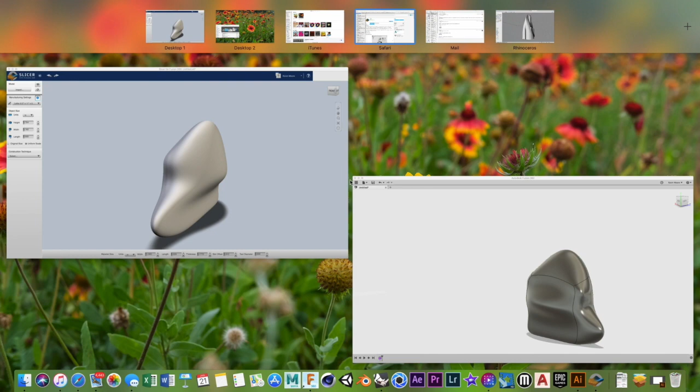Then once you download it, go through the installation steps on the program, and then launch Fusion. Open the model that you've created that you want to make into a sculpture. This is just a really quick, easy kind of shape, just as a demo.

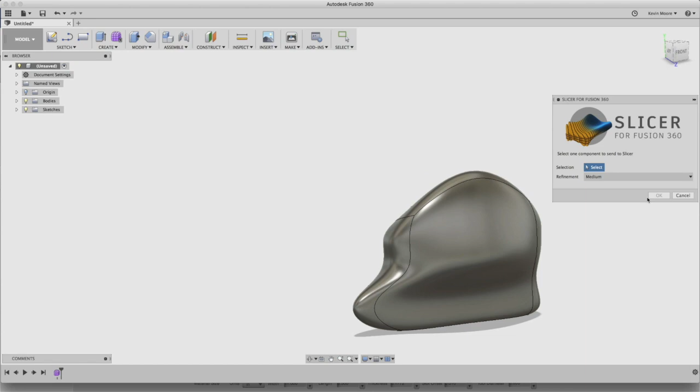And then you should be able to go right here to make, and then go to Slicer for Fusion 360. Make it high, click on it, okay. And then it'll automatically launch Fusion 360's Slicer plugin.

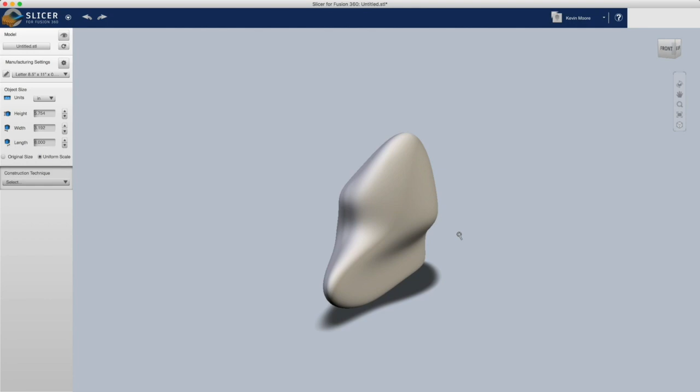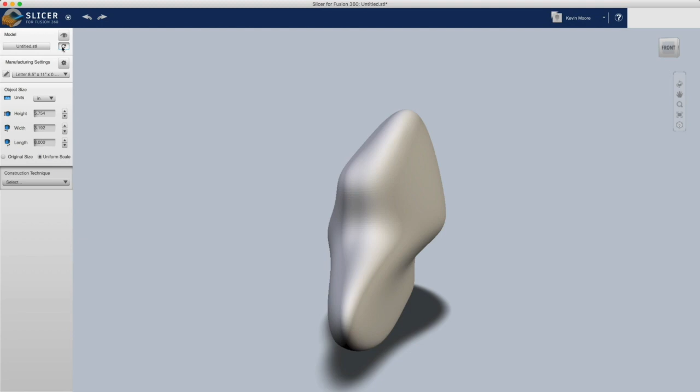Alright, so this is the model, and navigating this screen is a little different than Fusion 360. You actually right-click to move around the orbit tool, and then zoom is the mouse wheel or pinch. So now, first step, we want to make sure it's oriented the right way, which it is. If not, you can click on this little rotation button, and it'll rotate it a few times for you.

So mine kind of went up like that.

Okay, so now I'm going to change the size of my page that I'm going to use. And if you're using the laser cutter, the maximum size is 12 by 16. So you click on a little plus window down here, rename it to 12 by 16. And then you're going to do the settings over here.

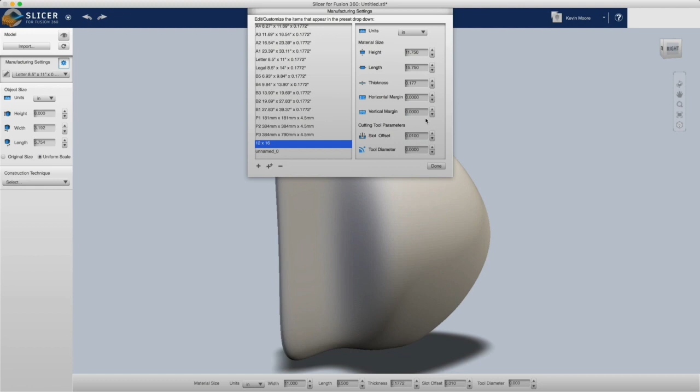I leave 1/4 inch on either side just to be safe. So I make the height 11.75, the length 15.75. Thickness, I've got a caliper, so bring your material to me early and I will measure the thickness, and you can enter it right there. And then the rest of it should pretty much look like how I've got it here. And of course, make sure you've clicked on to 12 by 16, that's highlighted, and that's where you're setting this up. Units and inches, done.

Alright, and now you've got to click on this window and change it to the right size. And then we can also increase the size of this. So our height right now is 8 inches. If I wanted to make it 10 inches, it depends on how much material it's going to use.

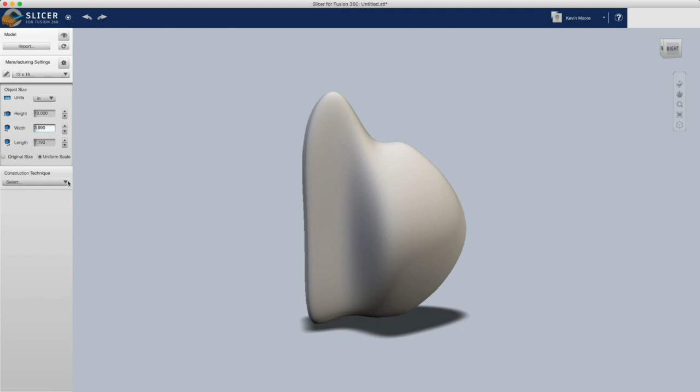So then we select our construction technique. Now all of these techniques are going to be laser cutter friendly. So for example, stacked slices, that gives you flat planes stacked, but because there's no negative space within the planes, it's going to use a lot of material. See, so on the right it gives you kind of the plan of how it's going to look, and so you've got 8 sheets.

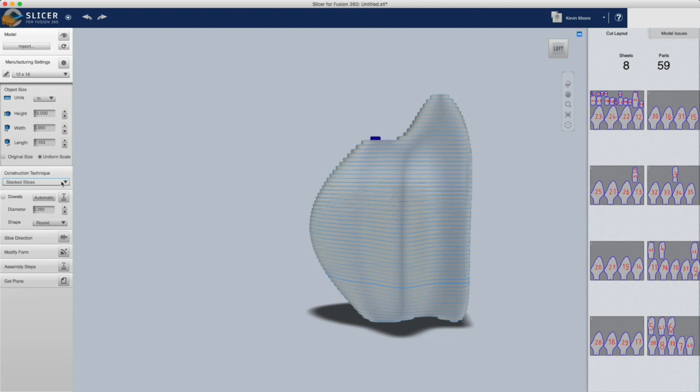So if you want to use 8 sheets, you can use this technique, but there are other techniques that use less. So let's go to a different one: interlocked slices. And so that gives you a little bit more negative space, which gives you more room to mess with.

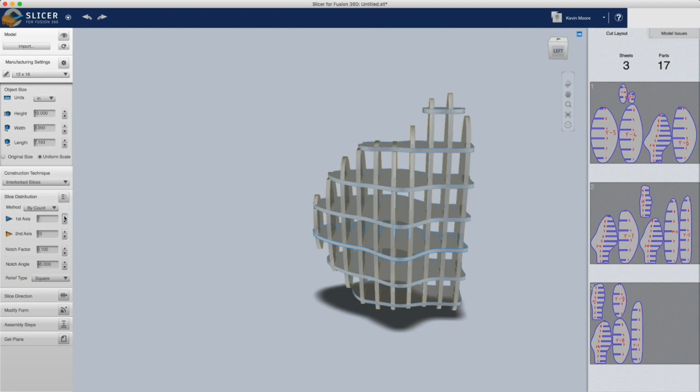So I can remove sections if I want to. I can do all kinds of changes. So I can change my axes so I can make more. Try to fill up 3 sheets as much as I can. I can reduce the number.

So it's just kind of a simple shape like that. And then it's only using 2 sheets.

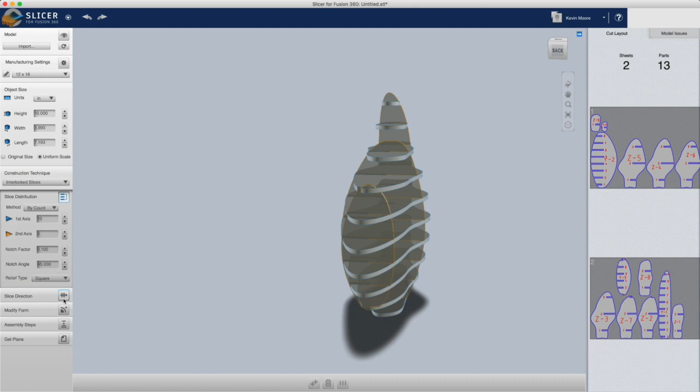And then there's other things I can do, like I can modify the form or change the slice direction. This is actually, so if I rotate it, you'll see. So there's lots of different ways you can modify it.

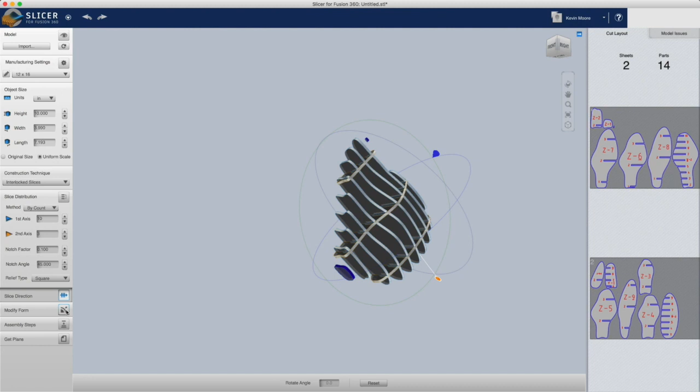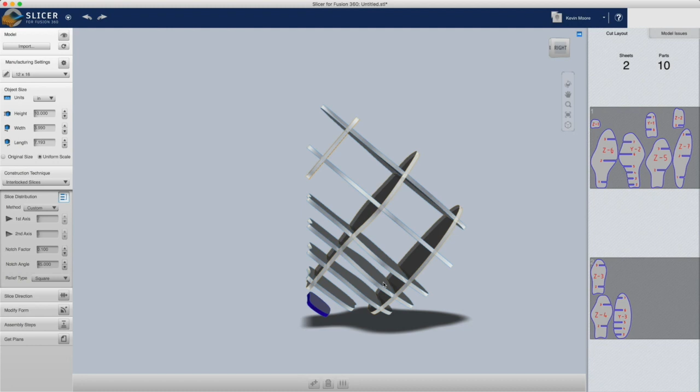You can also, if you wanted to mess with the symmetry some, you can just click on, actually let me finish the modify form, go over here. I can click on different panels and delete them to kind of create a little different look. If I want to get rid of this one that's floating too, you can undo if you want to bring it back. And then I can click on individual ones.

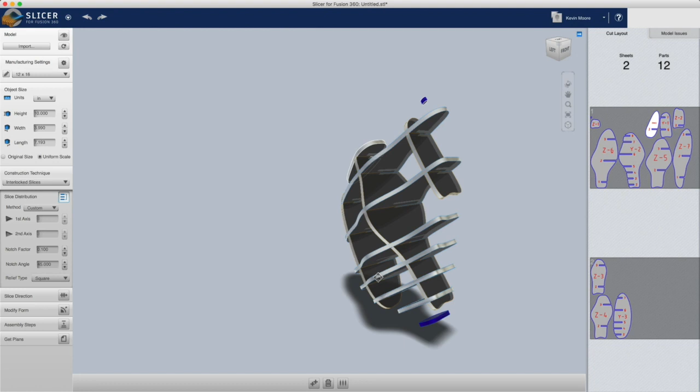The program's a little wonky sometimes and things get jammed up. But that's the interlocked slices, and you see you can delete certain things and move things around.

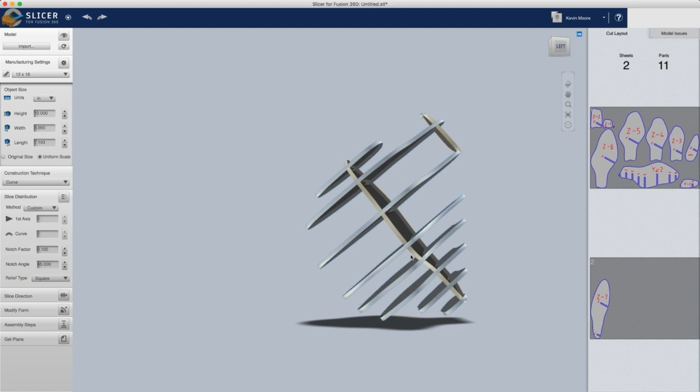And then there's also curve, which just kind of angles the shape a little bit more. And then there's another one, radial slices, which uses kind of a centered axis point. And so I can do by count.

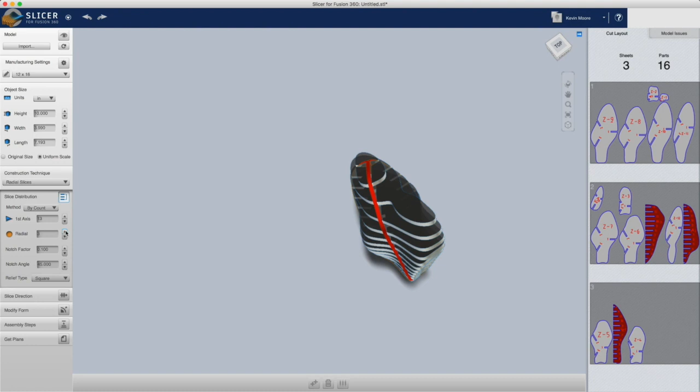Again, I can increase that count, increase my radial axis. And if you see these red marks here, that means that there's some kind of an error going on where there's parts that intersect each other or something like that. So you can play with the numbers a little bit, and sometimes you get rid of it, like I just did. So now these 3 sheets should work.

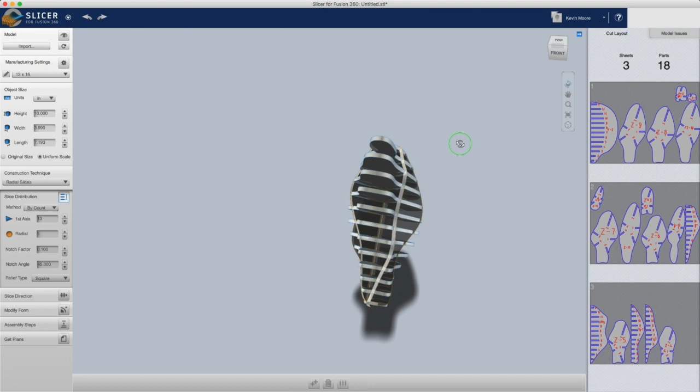Okay, so that's radial slices, and that's a pretty cool looking one. Then this one is awesome for things that are more representational, or if you want to play with just these structures. They're a little bit more complex, but they can be kind of fun.

So if I go to folded panels here, it gives you kind of an origami shape, which I might need to make smaller because it doesn't fit this big long shape onto the page there, and that's why I'm getting an error message. So I change the size of it. It might work better.

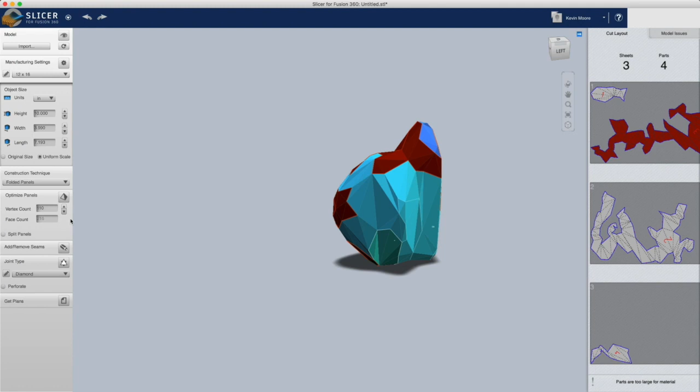But you can also change the vertex count. By clicking the down arrow there, it makes it less detailed. And then instead of having it folded, like even if you do this in cardboard, you could leave it all, have the laser cut all of these different sections, and it would perforate it so that you can fold it.

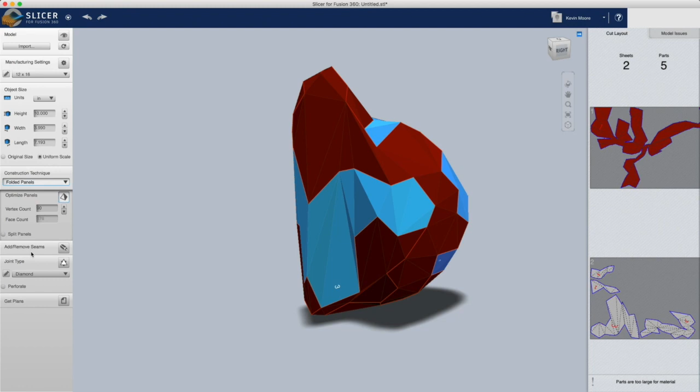But another way to do it that I actually like better is split the panels, and it gives you individual pieces, which is kind of cool. And again, I can lower my vertex count, so it's a little less detailed, maybe even fit it onto 2 pages.

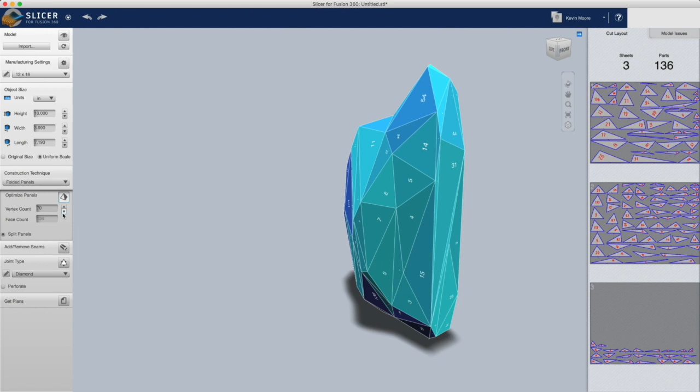So if I do one more. You got to kind of go slow, though, because it takes a second to kick in. One more down. There we go. Now I'm on 2 sheets.

All right, and then I can do the joint type. I can change it from diamond to gear, which gives you a little notch around it. But that might not work depending on how thick your material is. So if you change the thickness of your material, all that red might disappear.

Another way to do it is laced, which is kind of cool because laced gives you holes in the patterns, and you can just sew it together pretty much.

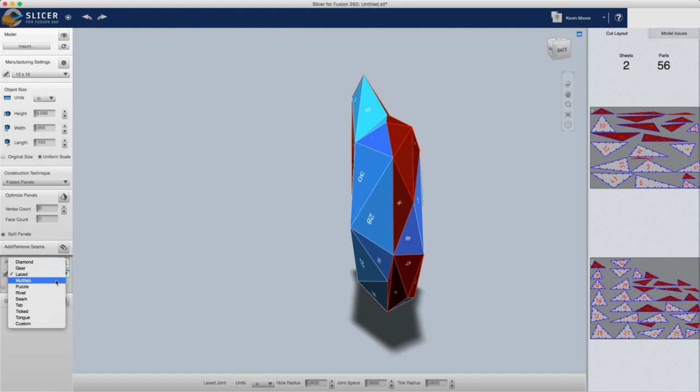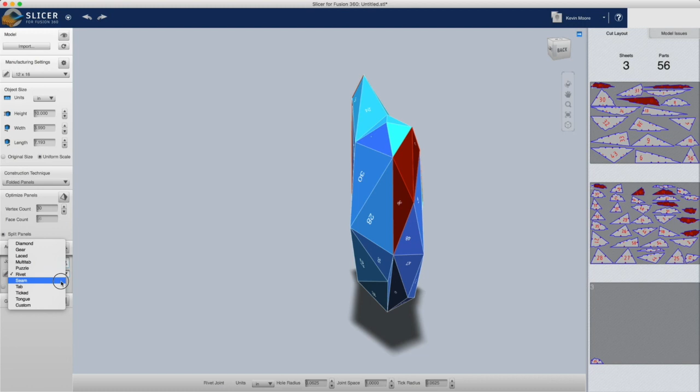Multi-tab has little spacers on it. Puzzle, that one's actually pretty cool too. So that's the puzzle one. And then rivet, seam, etc. So you find one that seems to work for you.

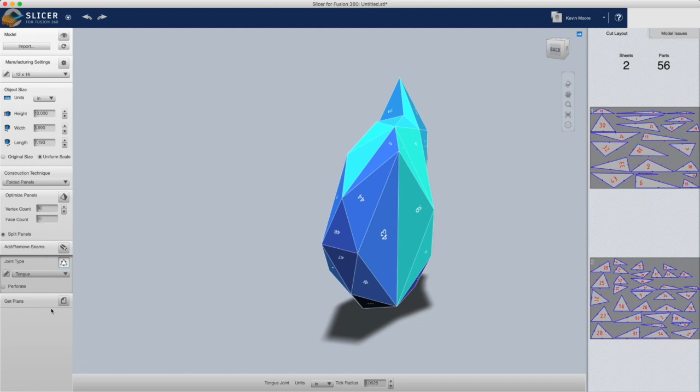And then you use that design. So, okay, we've got our folded panels, and now what we're going to do is we're going to get our plans. So we click on Get Plans, and then it gives you these two sheets, and you can change it to a PDF, which is good because then it'll open with Illustrator, and then export to my computer.

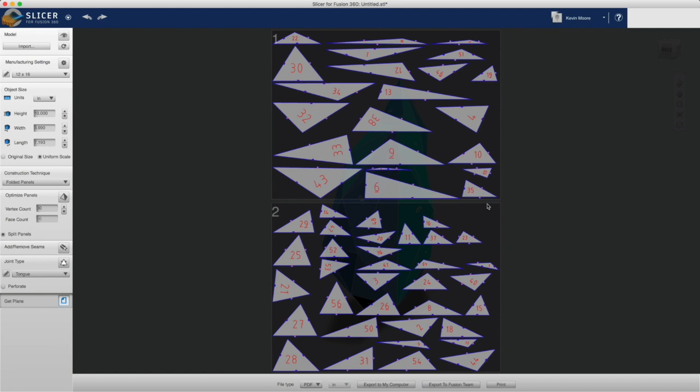And we go to our desktop here, we'll save it as plans. And then I'm going to open Illustrator so I can edit it. So let me open my desktop, go to plans, and open.

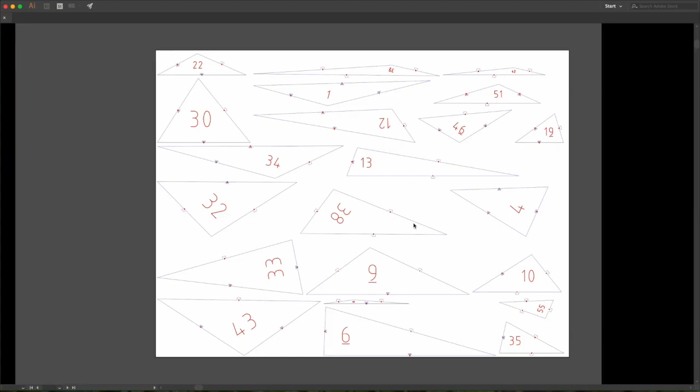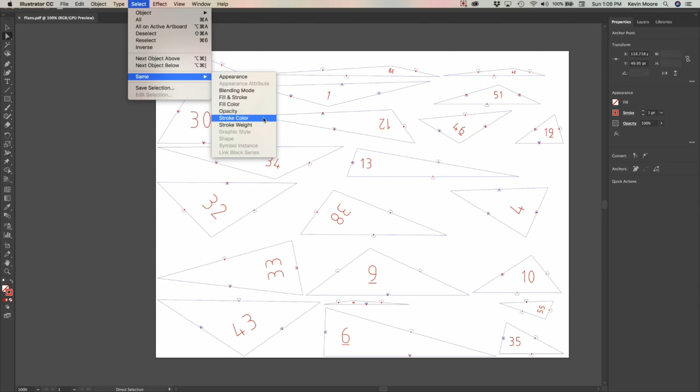Okay, now I'm going to open one of two. Alright, so now what I want to do is I'm going to select the red numbers here. So then you select one of the numbers because they're red with the white selection tool. And then we go to select, same stroke color, and it selects all of the red. And then you hit delete.

Okay, so now all we have left is the blue. And with the laser cutter, the laser will cut anything that's red, and it will etch anything that's blue. So by mistake, the program's got it backwards.

So if I click on one of these and then go to select same stroke color again, it selects all of that. Then if I click here, I bring up this window, I change the B, which is for blue, to 0, and I change red to 255, and then OK. And you can see now all of the tiles are cut or set for cut.

And you want to save a copy of the PDF that has all these numbered, and try to keep it somewhat organized, because you're going to use those numbers as a key to put this whole thing together. So it's really crucial that you save that.

Now, we've also got to change the size of this paper or cardboard or wood, whatever you're using, to go along with the size of the laser cutter. So now what we're going to do is we're going to go to the document setups here. Go to document setup, and then edit artboard. Click on that, and then